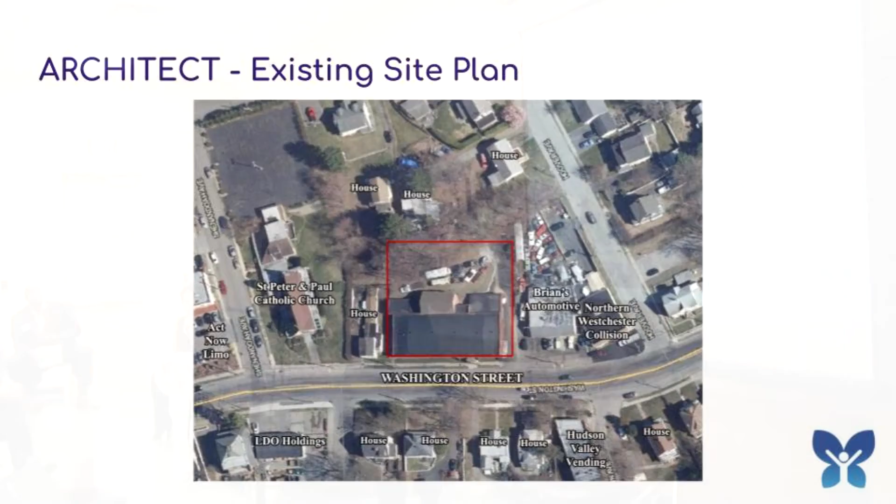Basically this entire area was an old warehouse built right after World War II. In that warehouse are 6 or 7 very large trusses. They're in great shape, but they mean the entire area in here is completely open, and you'll see in the designs that gives us enormous flexibility to create the kind of spaces we're just hearing about, where people can gather, be off the street, and be filled with light.

They also had a variety of additions towards the back, some of which were okay, some of which were not. So we're going to be removing two of those, and we're going to be reusing the double-height one, which looks like the oldest one, for the administrative area.

But the biggest change—there are two big changes that impact the community. One is that we're going to get rid of the southerly end, the southerly bay of the building, so we can get a road that can handle two-way traffic and emergency vehicles, to make a safe way to get in and out of the building, not on the street, but actually towards the back.

In a covered area, completely out of sight of the street, completely away from the street. The main entrance is to the back of the building. The other thing we're going to do is add a wing here that has an elevator and stairs, because we have to for safety.

The largest site impact is—you can see this is a hill, and it actually goes up pretty steeply. What we want to do is take that hill down and make the parking lot as low as we can while still draining water into the subsurface drainage system that already exists in the street. We also want to make that an invisible parking lot.

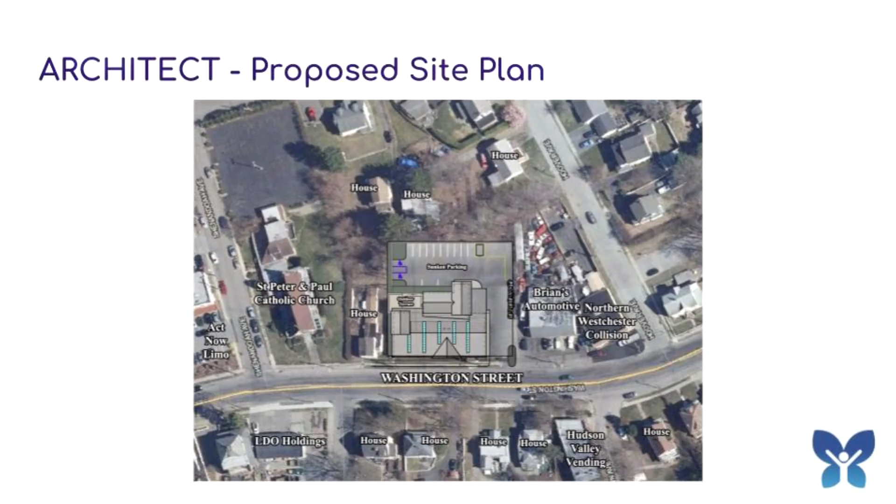Next slide. So essentially what we're doing is an addition and a second story in this area for a quiet, contemplative space away from the hubbub of the building, so people who need some time can go there. We're also making a large overhang here to cover the entry and keep it away from the street.

So underneath, above this area here, we're going to be putting on top of the trusses a roof like this, tight to the trusses, that gives us a little bit extra room. When we pull the building away, you can see that blue is where the building was. We have a 12,000 square foot building now.

We're going to have a 12,000 square foot building when we're done. We're removing 3,000 square feet and putting back 3,000 square feet in a different orientation, which enables us to create different spaces in a way that actually pulls the building away from the neighbors.

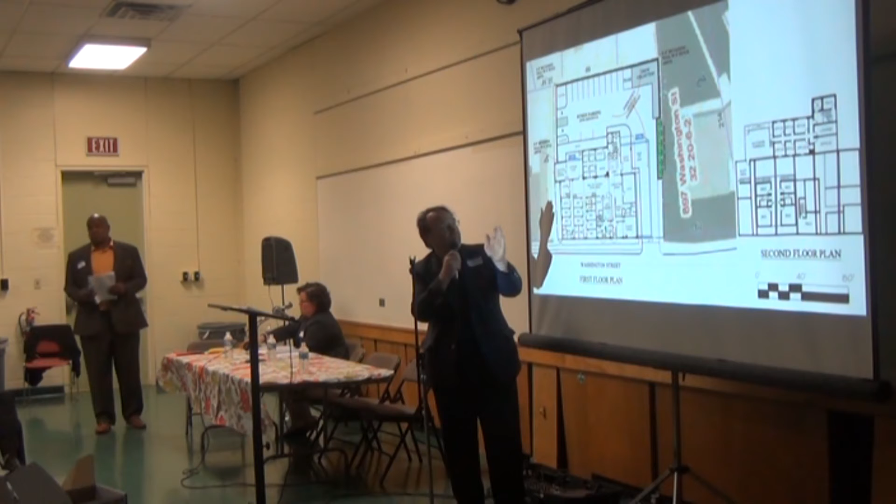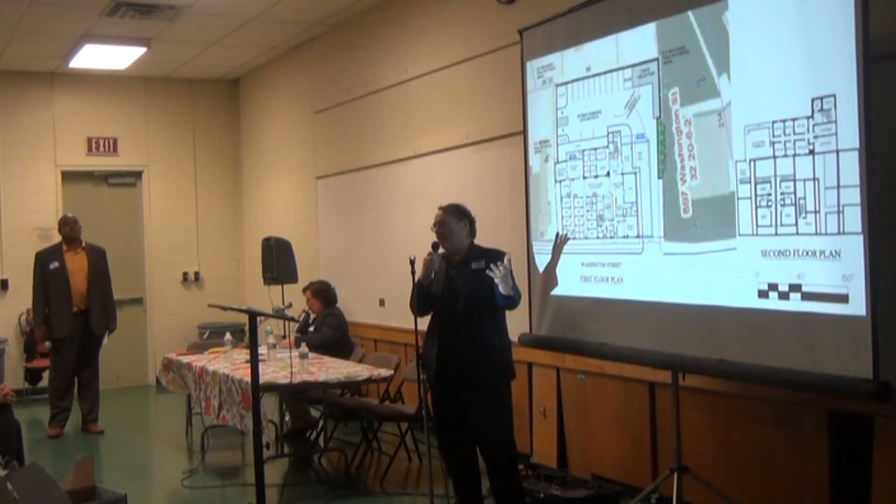In truth, what we have here is an outdoor area where we're removing the building, keeping this wall that exists here, not changing it at all, and making an outdoor space where people can be outside but not in the street. They can be out of the weather, they can be in the sun if they want, so it's an outdoor area and an interior area that's covered, and for each one of these trusses, there's actually a skylight, so the light comes down from there.

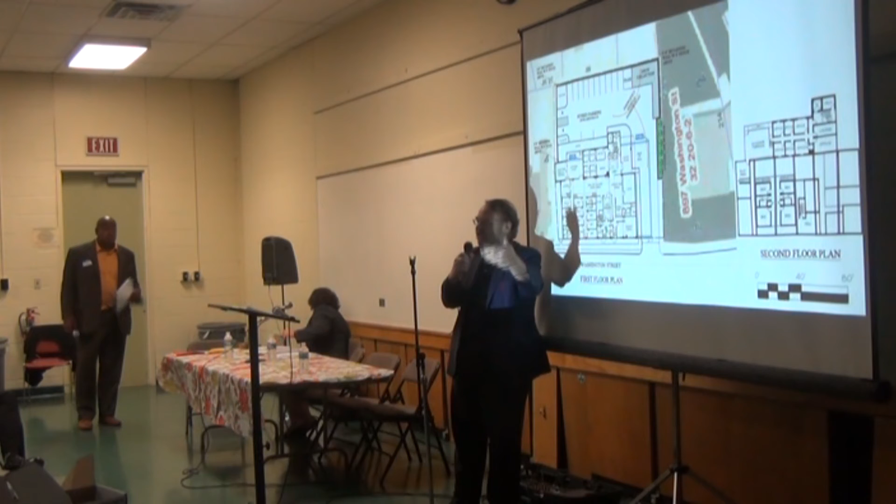We do top lighting here and windows that are above the height of the wall, and also in here. So the light comes in from above, not views going in or going out - a sense of safety, a sense of natural light, a sense of openness.

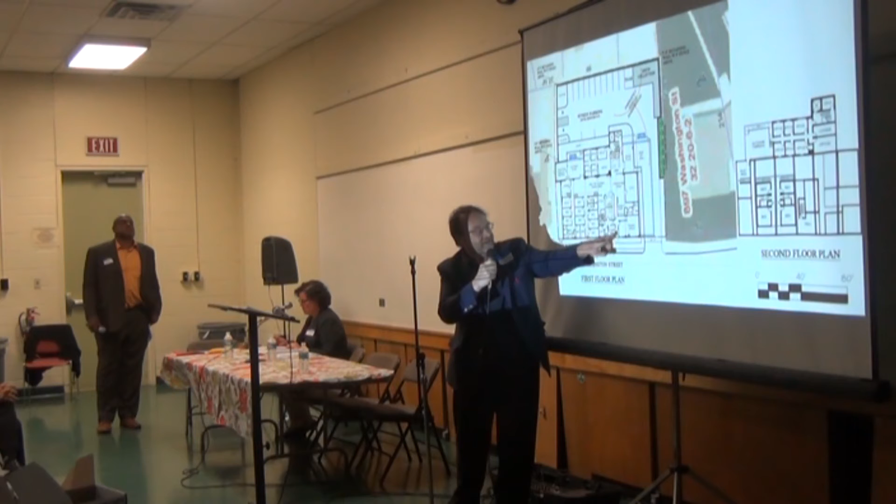These are all sleeping spaces. This is the kitchen we're talking about, an actual real kitchen where classes can occur. There's also an exhibit space and sort of open space that faces the street. There's an occasional use of an entry here for this space, and an occasional use of this space here to supply the kitchen and other service areas.

Then up above, in the far right, you'll see we've got mechanical space and more isolated bedrooms that you'll see in the lower part of the plan, allowing for different genders or different populations.

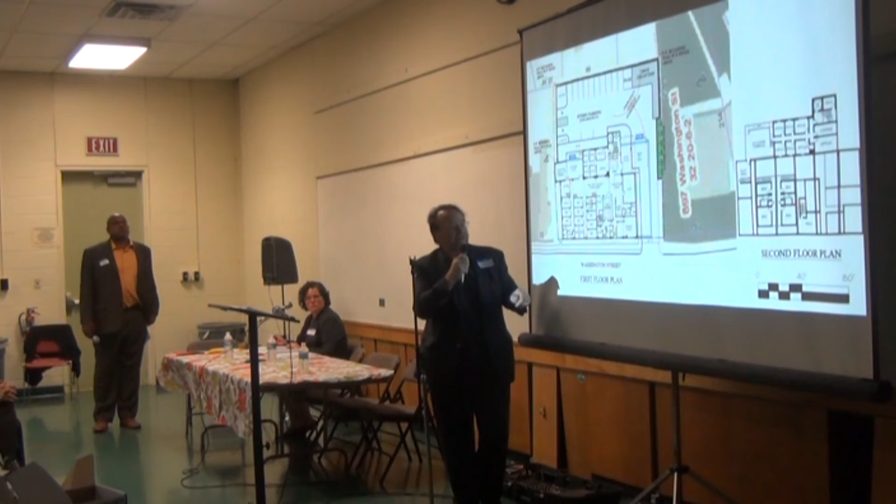And we use clerestory lights, meaning high lights, to let light in but not to let views in. And we coat the entire building in stucco.

Everything you see here will be reviewed not only by anybody who wants to come and talk to me about how they think the services should work, but also by whatever the aesthetic regulatory bodies are of the community - either an architectural review board or the planning board, whatever.

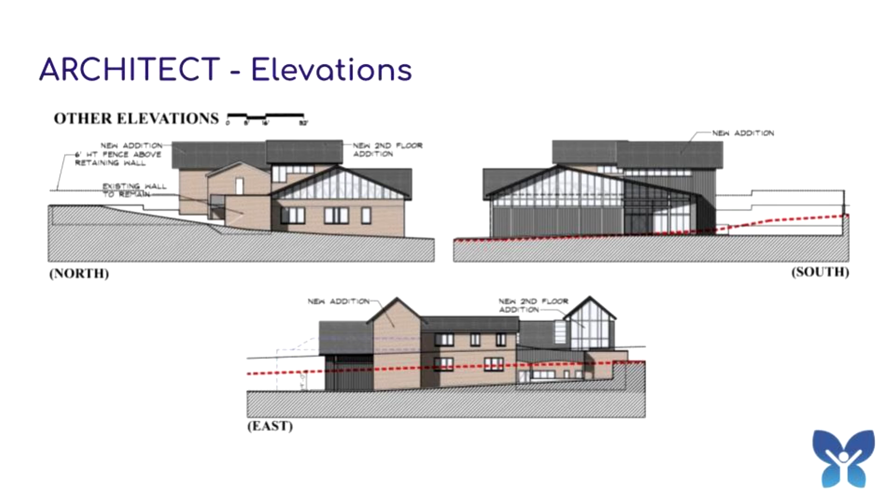Next slide. And then the other sides of the building, you can actually see what we're doing. The red is the existing grade line, and this is where we're taking the grade down. This black line here is where we're adding a fence above that.

So for this area, it's completely covered from the east, from the south, and from the north. You can see here's the natural terrain. There's the retaining wall, and there's the wall that obscures it.

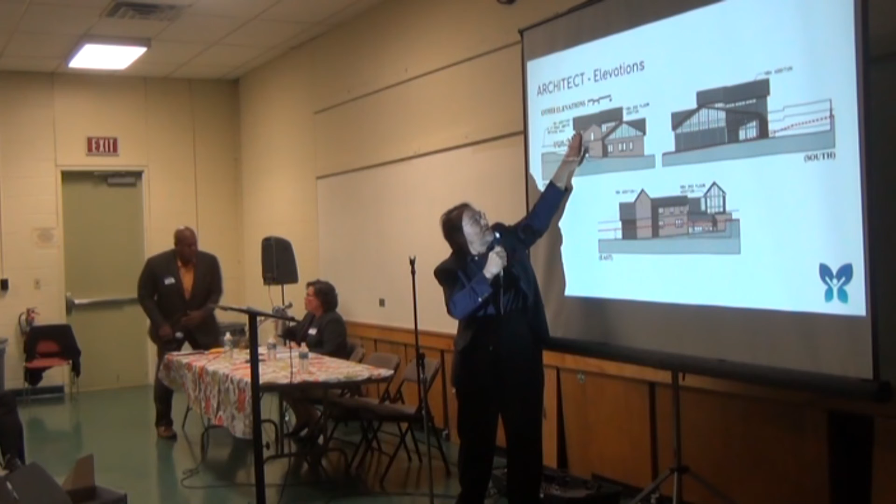In addition, for the elevation, the new second floor addition, the quiet room space up above - the actual glass lets light in from above. You can actually see the truss behind there faintly.

There's the entry to the south, which has got the covered area to the right, with natural light coming in for the sleeping areas that are beyond.

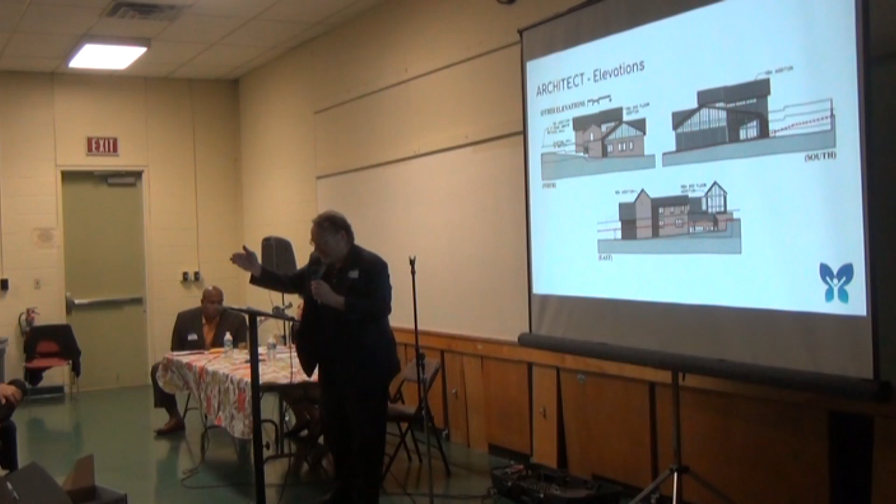So essentially, what we have here follows something which you should know - Jeanette Phillips will tell you. The first housing project they ever did was at 203 Smith Street, 32 years ago.

My sister lived here until she died last year on North Division Street. I've worked for the Family Resource Center, Hudson Healthcare. We just finished a house up on McKinley Street - the yellow one with the nice decks on it, it's just sold. We did that for the Housing Action Council.

My whole life has been dedicated to making good design for people that need it the most. People that need it the most aren't necessarily the people in this room - they're the people that don't have a voice. So I hope you'll give us your voice, and I want to thank you for your time.